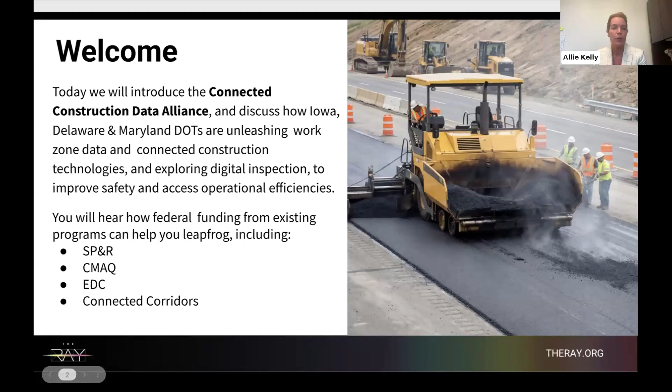As a part of this webinar, we're also going to talk about existing funding streams that can be leveraged to help leapfrog your state programs and accelerate your progress towards some of these applications, including SP&R, CMAQ, Everyday Counts, and the new USDOT Connected Corridors program.

Just a little bit of background on the RAY for those of you who aren't aware of our work. I'm located in Atlanta, Georgia, where the RAY is headquartered, but we're a national nonprofit organization, have been in operation for over 10 years. Our mission is to reimagine transportation and transportation infrastructure to be safer, cleaner, and more productive. Our first DOT partners in our home state are Georgia DOT, and along with the RAY and GDOT, we've developed a test bed on Interstate 85, which is now known as the RAY Highway.

Safety is core to the mission of the RAY, and at least half of the infrastructure projects that we have developed with GDOT on the RAY Highway are focused on improving and enhancing transportation safety. But we do work nationally across all levels of government to facilitate innovation in transportation and infrastructure projects. Some of our partners include at the federal level, USDOT and USDOE. We work with more than half of the country's state DOTs and a handful of tollways, Class 1 railroad systems, and CVG Airport, our inaugural airport partner.

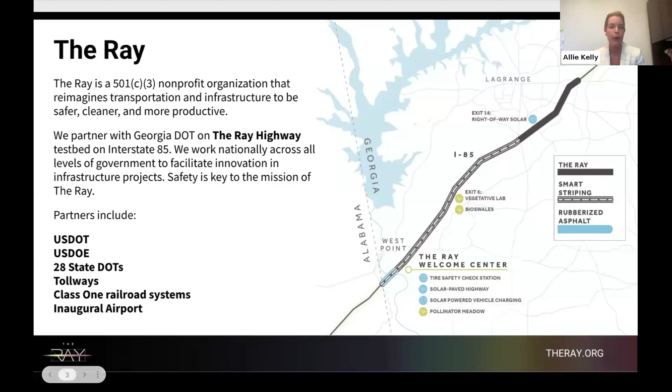So now I'd like to go through and introduce our speakers in the order that they will be speaking. First, we will hear from Cassidy Blowers, who is the statewide construction resource engineer at Delaware DOT. Cassidy's got 18 years of experience in highway construction, and she has become a leader in the implementation of equipment telematics to deliver real-time worker presence alerts and to enhance safety in work zones as a part of the Federal Highways ADCMS initiative.

Second, we'll hear from Jimmy Hovatter, E-Construction Business Manager for Maryland DOT's State Highways Administration. Jimmy has 22 years of experience as a project engineer and inspector, and he administers the Maryland DOT e-construction systems, including the integration of new technologies.

Third, we will hear from Cedric Wilson, who is the e-construction program administrator for Iowa DOT. Cedric has 33 years of experience in highway and bridge construction and is a national expert in digital delivery and e-ticketing.

And our last speaker is Roy Sturgill. Dr. Sturgill is the Associate Professor of Civil, Construction, and Environmental Engineering at Iowa State University. He has a former career in engineering with the Kentucky Transportation Cabinet, and he also chairs the TRB committees on utilities and right-of-way.

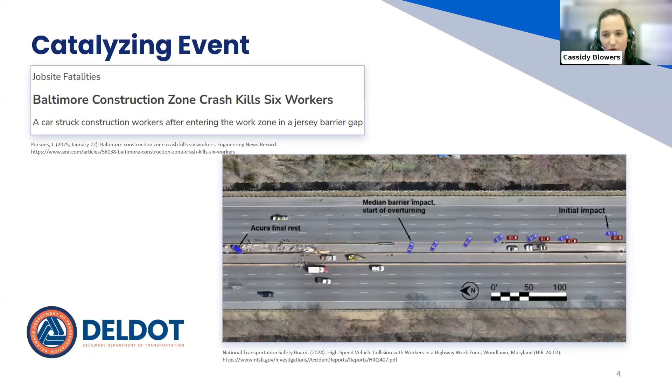What the actual focus of it was related to something that happened in a neighboring state. It was a very unfortunate event. I think anybody involved in construction has either experienced it on one of their sites or never experienced it. There was a fatality in Baltimore on I-695, and it was a very bad fatality, there's been National Transportation Safety Board reports on it. The contractor did nothing wrong, but we looked at it, and specifically my supervisor looked at it, as an opportunity to harness some of what we were doing to improve work zone safety.

Now, at the time when this occurred, we were deeply involved in Everyday Counts 6 e-ticketing initiative. And if you look at those e-ticketing initiatives, most of those tickets have location-based data associated with them. And the thought was, can we take that location-based data and use it to improve work zone safety, to put a notification out? Because if you look at our current process at the time, it was very manual. So the hope was we can use this digital information to make an automated notification.

The discussion at the time with our vendor was, yeah, we can probably do that. We can make it automated. We can remove multiple manual inputs and turn it into something that's hands-off, so inspectors don't have to deal with it every single day, so our traffic management folks don't have to deal with it every day, but a notice still goes out to the traveling public. But we were just dealing with e-ticketing data, and that wasn't quite enough to give updates throughout the life of a project.

We're not always receiving hot mix, we're not always receiving stone, we're not always receiving concrete. We needed additional data sources. And what we ended up doing is going and capturing equipment-based data sources. And that equipment is active - doesn't matter if you're receiving material, if you're digging a hole, you need to have active equipment on that site. And with telematics, we can capture that status and update the traveling public as to what we're doing.

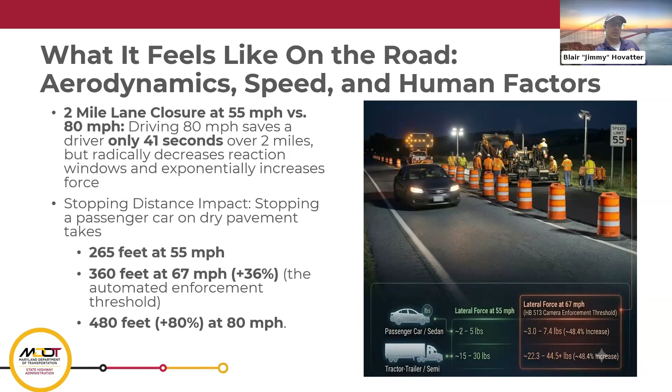In 2024, Maryland updated their laws about automated speed enforcement after a devastating accident on the Baltimore Beltway in 2023 that Cassidy already mentioned. The Maryland Road Workers Protection Act updated our automated speed enforcement laws, which is the little car with the lights that flash at you when you zip past at the beginning of a road work, that mails you a ticket about a week or so later.

Anyone traveling 12 miles or more over the posted speed limit is issued a speeding ticket in increasing increments at the different speeding thresholds. The faster you go, the more it hurts. The rub is that those fines are doubled when there are workers present when your car goes buzzing past.

This is one of those laws that is designed to hurt people's wallets in order to make them not want to do the dangerous thing. This is not trying to shake them down for money. The control is completely in the hands of the passing vehicle to just slow down and keep everyone safe.

The real crux of any good law is enforcement, though. How can we definitively prove each time that the workers were on site and limit the error for manual reporting? Right now, someone has to physically flip a switch that says, hey, we're here, and then remember to turn it off whenever they're wrapping up.

The answer is actually fairly simple. We can automate information gathering by utilizing real-time ticket deliveries and telematic information provided by equipment within the work zone. We can paint a solid picture of exactly when people were on the job site and doing construction activities. We can take that data and use it for immediate updates to GPS programs used by the travelers.

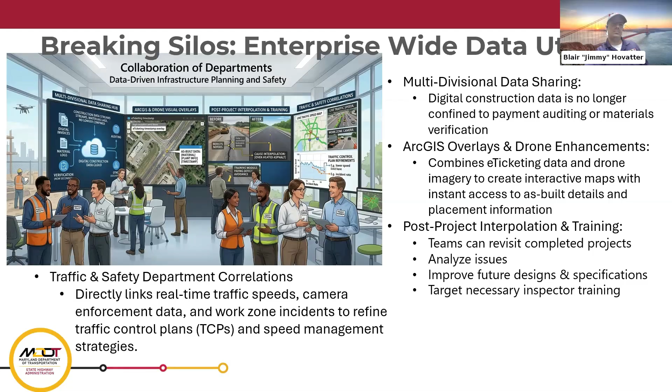To bring this full circle, digital data is not just administrative record keeping, it's modern safety infrastructure. The ecosystem here requires involvement though, more relevant data and with more divisions utilizing it. We have to build that data structure out, which requires all our stakeholders coming together, from design through inspection and our contractors. We have the data stream to create that safety infrastructure, but it only works when all the players come to the table and help each other.

We want to see more ideas, taking the data further, exploring new ways of capturing information and applying it to the aggregated model. The goal is to create a broader return of investment, getting out of the data more than what we put in. We need real-time accurate information in a wide variety of sources. The data is the real power here that will drive safety forward, and we can never have too much. Thank you.

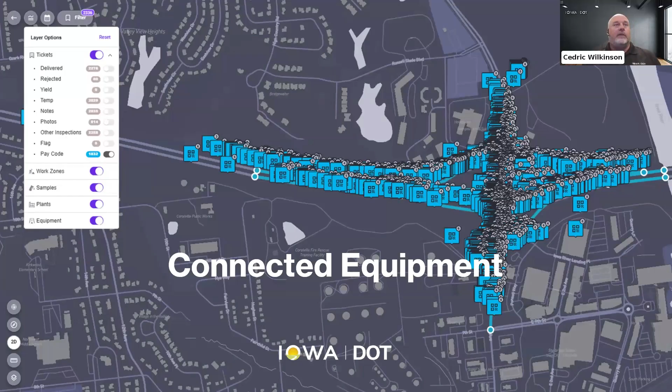So, a lot of people hear e-ticketing and we're talking about connected equipment, and I like to just say it's way more than e-ticketing. We started with an e-ticketing platform, but it's way more than that. It's safety, right? That's our number one goal here is the ability to take our inspectors and our construction partners, contractors, away from the dangerous pinch points and things like that.

And so, we're digitizing our concrete, our asphalt tickets, project documentation, all those things you can see here. We've taken over 2,000 photos just a little over a year and a half using this system. So great project documentation. We're connected to AASHTOWare Project. We're connected to drone software.

And so in the piece here we're talking about is the connected equipment itself. And we have a little over 1,300 pieces of equipment connected here in Iowa. And so that really shows the mass of the equipment we're connecting to. And I'll talk about it a little bit later here, but we're from the asphalt paver to the milling machine.

Down to the side by side that the contractor has. So if that side by side is out there doing minimal work that day with anybody else, we know that work zone's active. So, it's not just the asphalt pavers or the concrete pavers. It's everything. Every type of equipment that has GPS on it anymore, we can connect to.

And so the work zone awareness, feeding into the work zone data exchange feed is big for us as well. Getting all of our traffic management centers connected together so we can see all of the data. And then digital stationing, and Jimmy just talked about the as-built creation. Once we get all the data, we're going to have a great as-built of what we built.

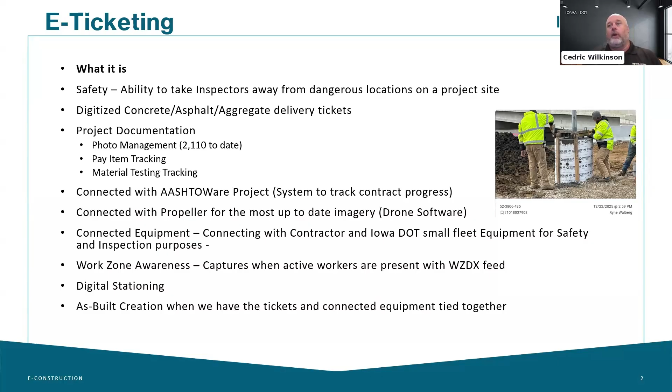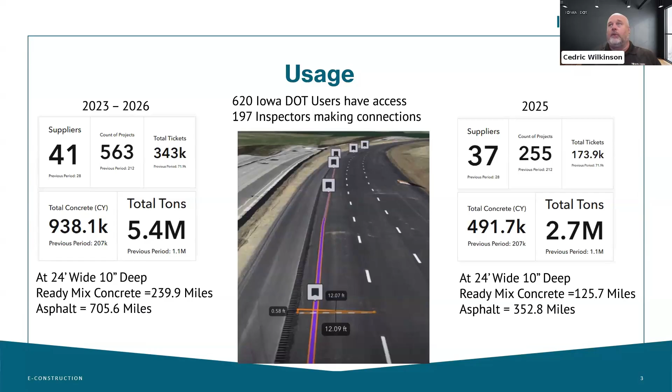And so just a little snip of what we do, what we've done here in Iowa, and I'll say a big variety of what we do. I mean, we got over 620 users that have access to our system, 200 plus inspectors that are in it. You can see here in 2025, we had enough to pave 125 miles of ready mix concrete, 352 miles of asphalt. So it's a large volume of tickets coming into the system that we know and can make out these work zone connections, these safety feeds for everybody.

And so what is it? What's connected? Cassidy had already hit on this as well, and Jimmy both. But we're taking the OEMs, right? So we're not asking the contractors really to do anything more than, hey, you have a connection to any one of those large vendors that we have out there, right? And so John Deere, Cat, Komatsu, you name it, we're connecting to those, and we're using a standard connection. So Cassidy hit on that as well.

So when I talk to the contractors here in the state of Iowa about using this system and what is it about, it's about safety. It's safety for their people as well, right? And saying that when your equipment is on our job site, we know where the job site's at. Once that equipment is turned on, we're giving out a safety feed to everybody. So that's not only helping our own inspectors, it's helping the contractor staff. And that's been a great relationship I've had with our contractors here in Iowa, is just telling that story of the safety, that we're out here to look after everybody, not just DOT or whatever.

It's everybody involved in the system, and really the message is pretty simple: workers present. I've got a slide here that'll show you where the impact comes from. Down here at the bottom, this is a report we pulled from Waze and Google Maps, and this is old data from 2025. We've almost tripled that now on notifications to people, but you can see the impact: 6 million people are impacted. That's a very large number just in the small sample size we have today, and once we roll it out to more and more, I can't imagine that number staying the same.

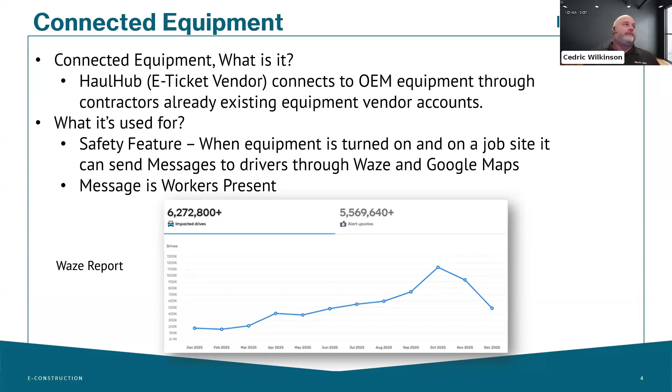So everybody that drives through that job site - Cassidy kind of showed this as well. Here's what's connected: is it the ready mix ticket? Is it the asphalt ticket? Is it the equipment? It's all three, right? So if any one of those is tagged on, we can send out the work zone awareness as well. Automatically broadcasting that is key too - the contractor doesn't have to do anything, right?

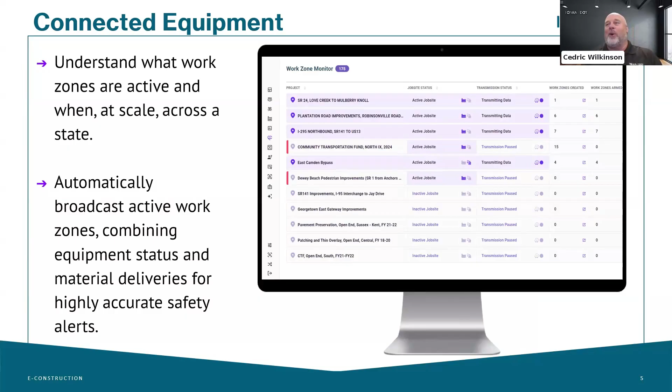You don't have to touch anything. Inspector, we just set up the work zone, and that's it, we're done. We set it up at the beginning of the project and we're done. I think that's key for me - we've got enough work to do, we don't need to add to it. So having that auto-magic work happening in the background is really beneficial for all of us.

You can see here how many work zones we've created in the last year. We went from 17 all the way up to 80 across the state now. Now that's not every single work zone we have, but you can see the impact is growing and growing even more. There's the machine count I was talking about - over 1,300 pieces of equipment connected. So that's real life, and you can see it's spread across the state of Iowa, not just in one centralized location. It's across the entire state, which is key.

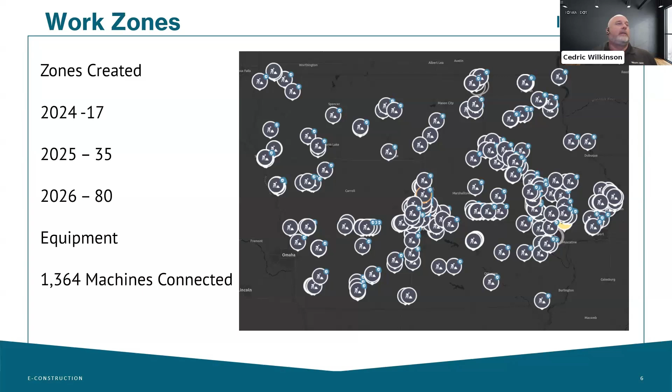So what does it look like? Here's an example in our application - on the left-hand side we can see where that equipment's at, and if it's yellow, it's turned on and it works great. On the right-hand side, what I love to show is the 548 with the thumbs up. If you've ever used Google Maps or Waze and it asks you, hey, is this work zone still here, those kinds of things - that's how many people are actually connecting to this. Our own message from the DOT saying there's a work zone here for the next 2 or 3 months had 2 likes. This, in one day, had 548 likes.

I like to point out that 'active construction workers present' is the key phrase there. If people see that before they get to the work zone, that's key - that they see it before they get there. Oh, there's people here, I'll slow down. People care about people, right? So when people see work zones, they automatically think I've got to get through this as fast as I can. But if they see 'workers present,' I think they take a real sense in knowing, you know what, I should probably slow down, what's going on. So we're actually having a good flow of traffic through our work zones.

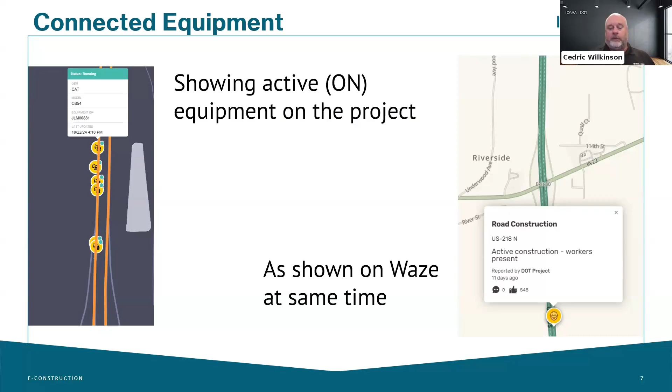And this is exactly what we're doing. You can see we've got the shuttle buggy there in front of the asphalt paver, we have all the rollers, we actually have the blade back there taking care of the rock on the shoulders. So you can see we have all the different types of equipment - it's not just the pavers or the big equipment, it's everything out there. On the right-hand side, this is our monitoring - what we can see and where we can see it.

And I think it's key - the other thing I tell contractors is when it's off this job site, I have no idea where your equipment's at, nor do I care. I only care when it's on our job site. So for contractors thinking about this or looking into this, that's the biggest thing I think they worry about - like, you don't need to know where all my equipment's at. You're right, I don't.

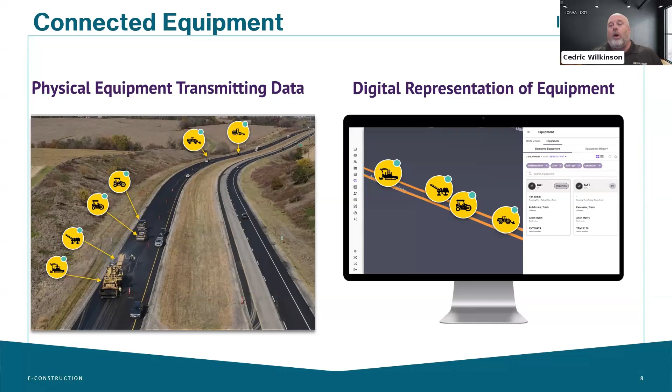I don't care where your equipment's at. I only care when it's on and in our work zone itself. And that's kind of an image of this.

One of the last slides here, notice this paver is gray. I happened to be on site this day, and the contractor broke down right at that location. So for asset management and asset tracking, they actually blew a hose in their antifreeze, and we had antifreeze running all over. We had to stop paving for that day and cut it out. Well, now we know exactly where that happened on the project site. So that's another good thing. We can monitor this area for future replacement if need be. That's another big piece to this.

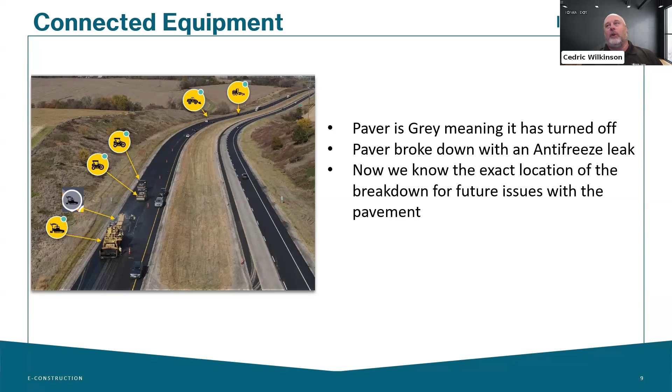Yep, it was a good example. I left early, so I didn't know what all happened, but that's the realization of how this equipment can help the DOTs out as well.

Just another quick view. This is a bigger job on Interstate 80 through Iowa, a big corridor. We had several pieces of equipment connected here, and you can see all the equipment that's turned on across this project site. That's putting out the message that there's workers present here. You can see all the different types of equipment we have - dozers, excavators, you name it. We had it connected.

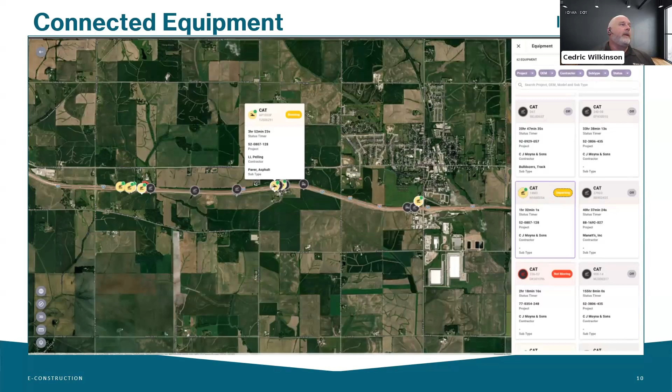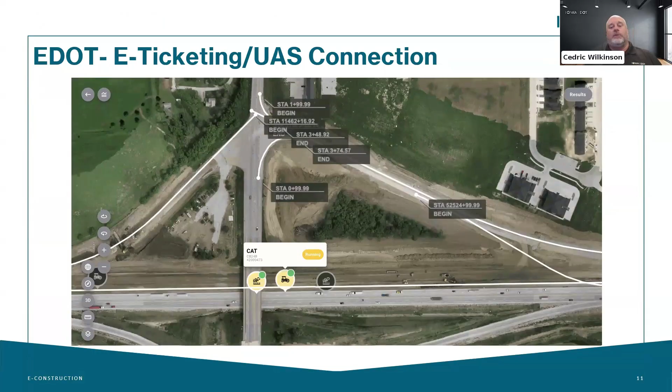Just a bit more - this ties everything together: the work zones, the drone imagery, the e-tickets, the connected equipment. It's all in one location, which is key for us - having one app instead of 25 apps really helps us. That ties the connected equipment into all this. So that's it for me. Thank you very much.

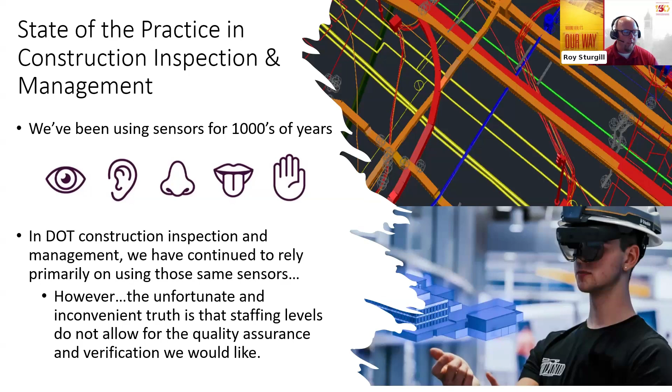And how can we continue to do the verification that we need to do and rely on those senses? Well, it's difficult. One of the unfortunate and inconvenient truths we're having to deal with at DOTs is that staffing levels no longer allow for the quality assurance and verification that we would like. I've got a chart here - this is an anonymous timeline, an anonymous state, but it shows a trend that exists with many DOTs across the US. The trend shows that fewer and fewer DOT employees are able to be out on site, while our construction spending is at least relatively stable, if not a bit of an uptick.

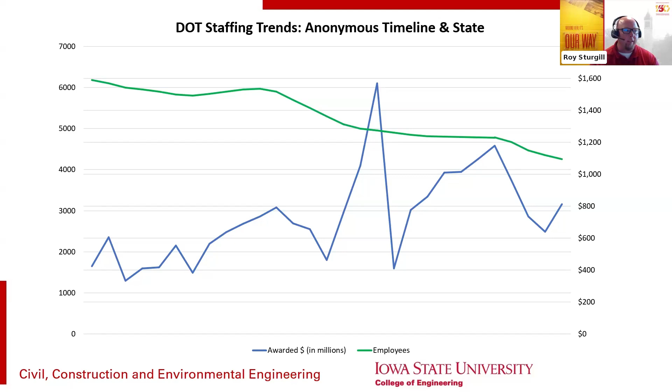So we're doing more work with fewer people. I think we've heard that consistently across DOTs. So how do we continue to provide the levels of verification and assurance in the construction products we're getting out there in the field, when we don't have enough sensors of our own? What do we resort to?

Some states have resorted to using construction or consultant engineering and inspection. Sometimes we have resorted to using technologies. But with technologies, we have issues that come up. How do we deal with the data flows from the technology? What level of trust do we have in the data that we are getting from that technology? Those are problems we continue to have to work through.

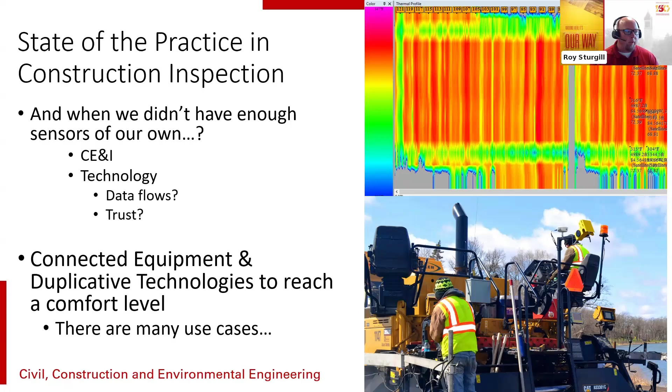Connected equipment is an avenue we can use with some other duplicative technologies to reach a comfort level. We've already heard about some of the use cases in the previous three presentations, but I have a few others I'm just going to reiterate, that we can use construction inspection technology and visualization techniques in many ways.

We can use the technology to build efficiency for our current staff, to help them be more efficient and have more coverage. We can use the technology for automated data flows — e-ticketing is an example, providing us with the automated feed of ticketing data. We can use different visualization platforms, modeling, as-built development, and remote virtual inspection. This is an advancing topic in our area, again to supplement the fact that we're doing more with less, and we have less inspection staff available to do that assurance and verification we need.

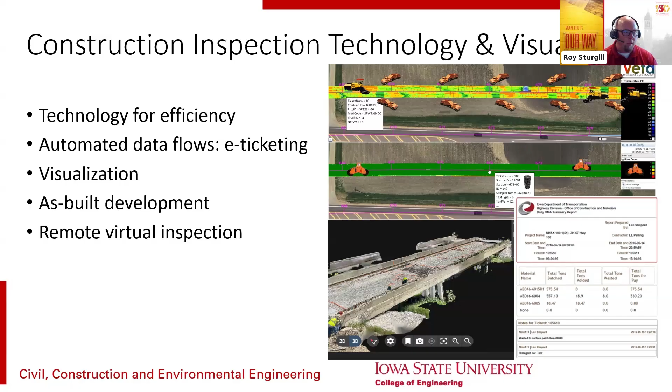So I've got some examples here. One example, going back to how we use the technology — an example of efficiency, this was a study we did where we used a handheld device and photogrammetry.

You can also use the LiDAR features of an iPhone or an iPad, sometimes referred to as pocket LiDAR, where we used a device with the RTK correction GNSS antenna. We were able to go out and capture bridge deck patching so that we could perform measurements in the office. With a quick walk across the bridge deck and capturing that data, we had everything we needed to go in and do those measurements later.

Whereas the prior approach would have included an inspector or surveyor going around to each one of those points, and at each angle or corner of those patches, taking an individual GPS shot, which would have taken substantially more time. So the technology was helping us to be more efficient.

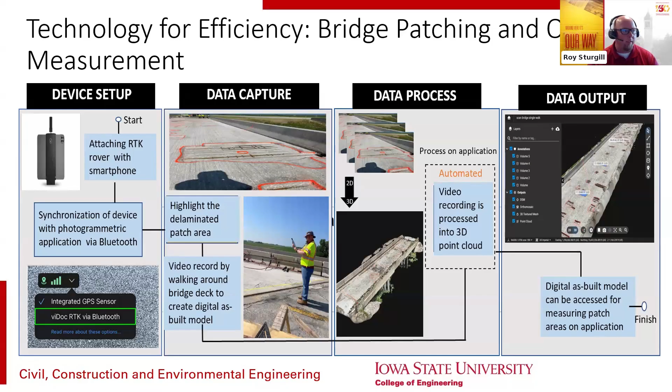There's also data flows from various sources, one of which can be this connected equipment concept. With connected equipment, there's a range of different sensors and telematic data we can collect — data from add-on sensors, or data from the telematics themselves. We can do a range of different data collection for different purposes that help support our inspection needs, whether that's getting temperatures, understanding speeds, or understanding layer thicknesses to be able to do theoretical tonnages. Those are all things we can do from this data from the equipment.

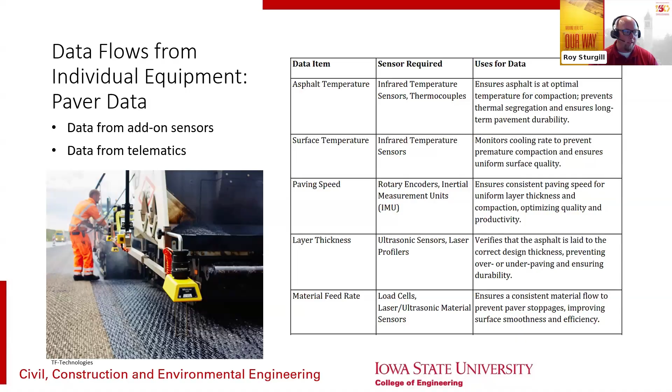Again, there's add-on sensors. This is an example you may have seen, where you have a paver-mounted thermal profiler. This infrared camera gives you highly accurate temperatures across the full mat of the pavement, whereas historically we may have gone out there with spot sensors to get individual readings at different locations on the mat.

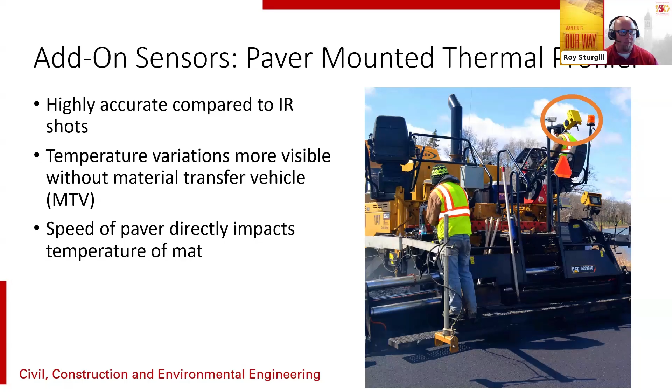This could create a data flow we have for the long term, and we can see temperature variations and speed of the paver. An example we've done a study for shows that, with a material transfer vehicle, you get really good temperature consistency across the mat. We have that data, we have the paver speed, and that becomes a record we can use as part of as-builting and asset management.

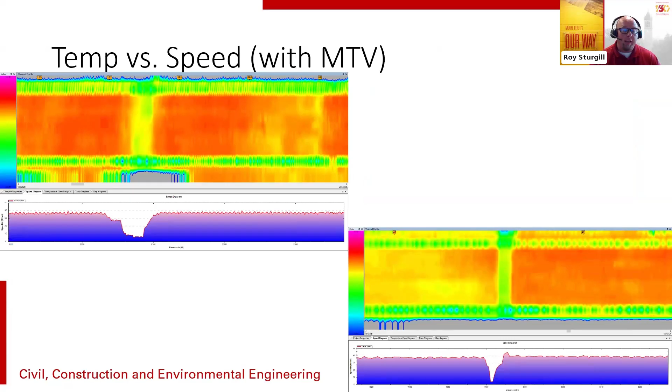In as-built development, this is another thing that can be simplified by the technologies we have. Using the same technology we use for the bridge deck patch measurements, you can create full models of the assets you have, such as this pipe, collected in minutes, instead of trying to take individual GPS points along that pipe, which could take hours.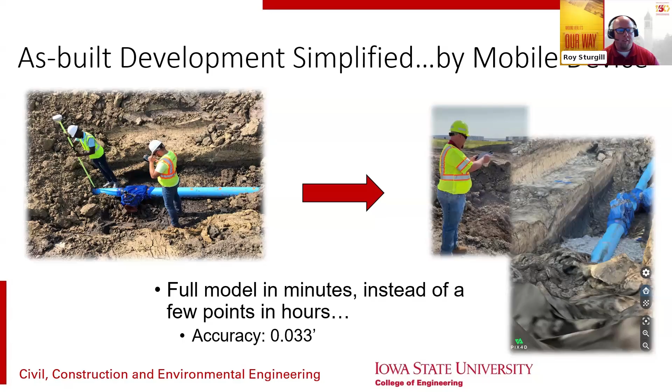So again, being efficient, being automated - these are all individual technologies that exist today, that get used today. And so when you start to think about coupling up these technologies, when the technologies collaborate, we can piece together oversight for an entire project.

DOTs today - some may be experiencing this, some may have more fortunate staffing than other DOTs - but the fact is there's some resurfacing projects that no longer have the oversight, or at least don't have the oversight they used to. When I was working early on, we would have even multiple people working on a resurfacing project. Now, my understanding is there's maybe multiple resurfacing projects handled by one particular inspector.

But we have technology that we can use to do the same things that an inspector is doing on site. So we can use e-ticketing that can help us get the ticket information and even do theoretical tonnage calculations. We can use that paver-mounted thermal profiler to get the temperature readings, or individual temperature sensors getting readings in the hopper and other locations. We could use intelligent compaction rollers, or rollers outfitted with GPS units, in order to understand what the roller coverage is and the roller operation, and basically get all the data we want through inspection, maybe even more accurately and more efficiently than using inspectors themselves.

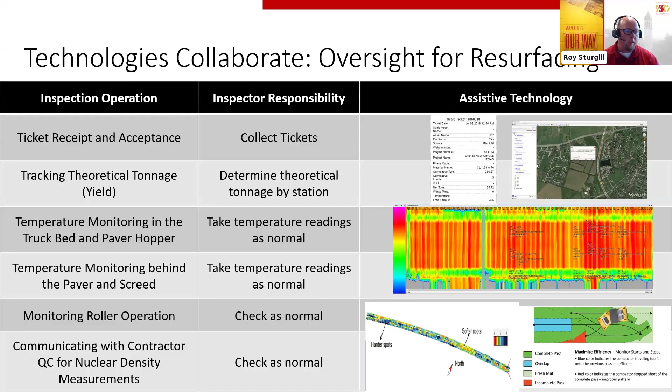So this concept of collaborating technology takes us to what the future may hold with connected equipment. As we think about connected equipment, connected construction, we can think about inspectors themselves having sensors and technologies that they're using in the field. We can think about field deployed sensors, such as pole mounted cameras,

UAS systems, those type of things. We can think about the equipment mounted sensors, so the add-on sensors, and then we can think about the equipment telematics and the system-based sensors that are included in the equipment themselves. And we need to be having a communication with the manufacturers about what those need to be.

That's one of the points that Cassidy mentioned, and this is to make sure the manufacturers hear a unified voice of what the DOTs want. And that comes back to the objective of the pooled fund study, because there is a future with connected equipment as to what inspection and verification might look like. And that future starts here, and that future needs data.

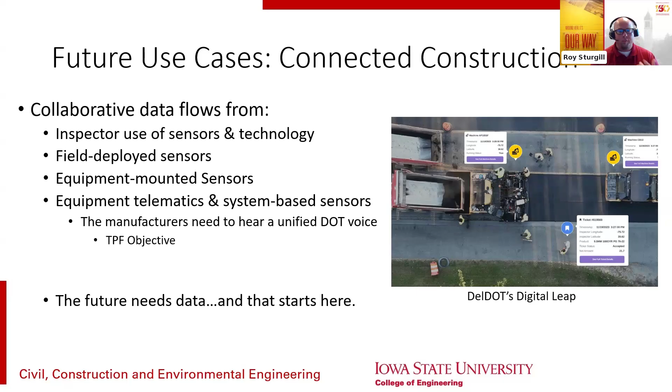So this is an example of what the future might hold, where our inspection forces, our engineering forces, may be located in a command center, looking out over various different projects. The equipment may be supplemented by drones and other sensors that are deployed in the field. Maybe having one inspector checking out multiple jobs, and all that data feeds in with automated alerts when things need to be checked out in more detail, as-builting that's occurring automatically and being stored for future analysis.

And this is a future that, while futuristic, is a reality. We have the technologies today. We just have to start piecing them together, and that's part of what this pooled fund study is about.

And so you may be asking, like, where does this money come from? I don't have it in my budget. So SPR is one source that could be used to help support this commitment. SPR funds are state planning and research funds provided by FHWA to DOTs. They're administered through the Code of Federal Regulations. And typically there's a 2% set aside that the DOTs set out as part of these funds for planning and research purposes. Those are divided into 2 parts.

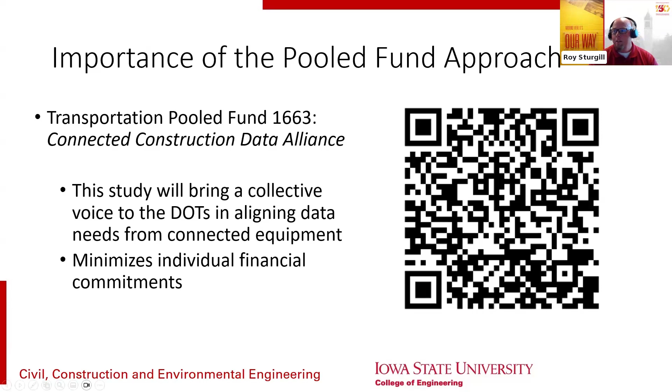Just to close up here, the importance of this pooled fund is to get us to have a collective voice as DOTs, to really work with the manufacturers so that this connected equipment concept can come in and support our future in inspection, verification, increased safety—all the things mentioned today—with a minimal individual financial commitment. So instead of each state looking at this separately, we look at it together with a unified voice.